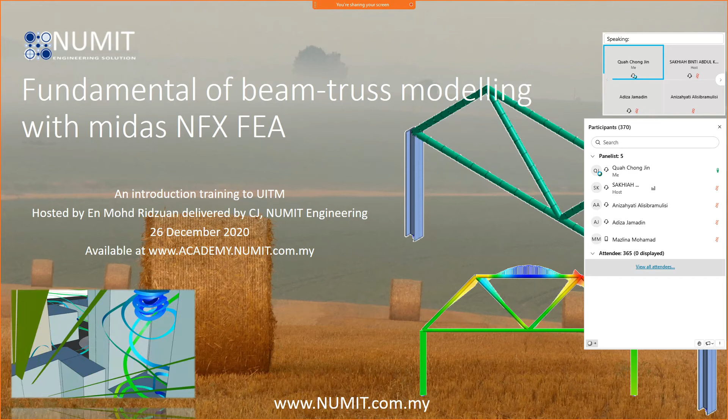So of course you need to have your fundamentals knowledge about mechanicals, about the civils, about the structures, etc. That is the reason why the software can only be used by most engineering students or engineers. Because of this, we have also developed Midas NFX to be used by a draftsman as well, who may not have any education background on mechanical or civil engineering, but they have knowledge on how to draft and design, so they can use Midas NFX too. We have two different modes in the software to help the user utilize it for finite element analysis.

I would like to make a short introduction about NUMIT Engineering. First of all, my name is CJ. I have a mechanical degree background in structures, fluid dynamics, and all mechanical stuff. What we are focusing on and doing right now is serving majorly in engineering - it's a large field. We're focusing on virtual design using CAE, which represents computer aided engineering.

This CAE basically has two different types of software: the one you're going to explore today, FEA, finite element analysis, which is for structural analysis, and CFD, computational fluid dynamics, for fluid and gas. I think you have fundamentals about the elements in our universe - we have gas, fluids, and structure. We are trying to develop software to govern the universe equations, and today we're going to focus on finite element analysis.

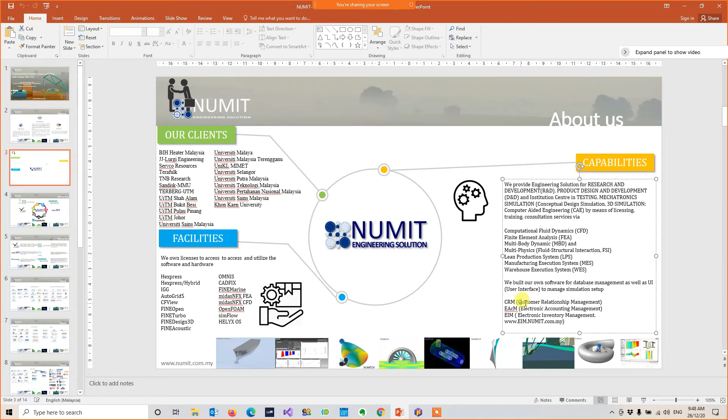Besides providing training on CFD or FEA, we do quite a number of other activities. We also build our own software for database management systems, for CRM, which is customer relationship management, and so on.

In the engineering field, we focus with our partners. We work with our partners for distributing the software and for distributing the training. The training and support is done majority by our own team in Malaysia.

You can see from the top right here, we have SimFlow together with OpenFOAM, which is an open source CFD software. On the left we have Numeca, which is also CFD software as well.

You might be familiar with midas NFX, which I promoted a moment ago. Siemens has a very large application, from testing up to simulation itself. We collaborate with them for the simulation area. Fraunhofer develops simulation software, but they are more focused on multi-physics.

So these are the summary about the company from different parts of the world. Numeca is from Europe, Midas, the software we are going to use today, is actually from Korea, and Fraunhofer is from Europe as well, and so on.

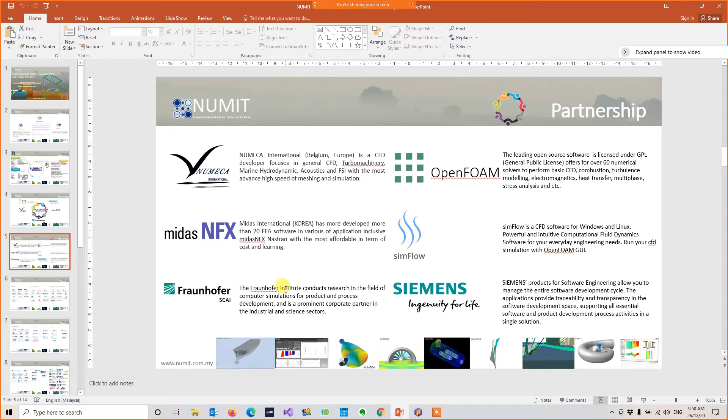So these are our local clients who use both our software, and these are our experiences working on different cases in different disciplines, with different industries and universities as well. So I'm going to skip this.

All right, so today we'll be focusing on the truss, beam, and frame using finite elements. I was informed that most of you do not have any fundamentals of FEA. So what is FEA? What is so difficult about it? FEA is something that is not difficult, it's not complicated.

If you have, let's say for example - let's go back to calculus - a differential equation, something like a PDE, a partial differential equation, how are you going to solve it in our engineering activities? You're only using integration, a different method of interpolation, and so on. I believe you've heard about the discretization of the partial differential equation, whereby you convert the original PDE, the differential equation itself, back into the finite difference method.

Okay, before I start with the sketch, this is the final result you're going to see. So this is the midasNFX. I'm going to start everything after that, but I'm going to show you the result first.

So as I mentioned, we are using 1D properties, and we have 3D as well, but today we will be dealing with 1D, because most trusses and beams are preferable to be designed in 1D. Okay, there are many reasons for doing that, right? So you can see the beam and the truss.

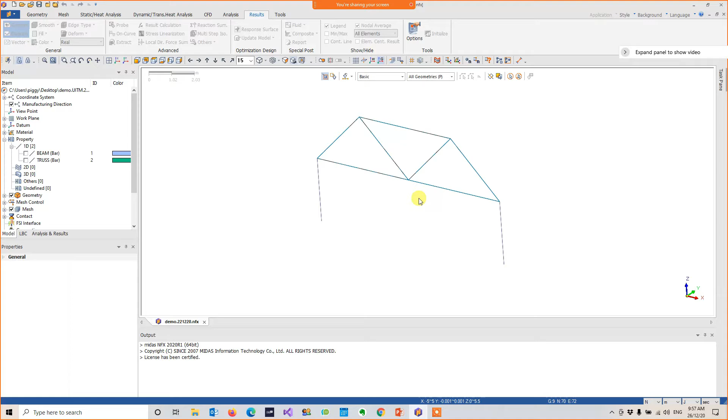Okay, so this is just for visualization. In our real sketch, there will not be anything like this—it's only something like this, right? But if we already assign the properties to the wire, the solver will handle it mathematically, and based on the I-beam properties and the pipe properties, calculate the stress, strain, the bending moment, and so on.

Okay, so I'll be starting a new one.

Okay, so this is the FEA software—this is the Midas NFX. So what we are going to have here is very simple. On the top, for geometries, you can import the geometry from your CAD software. I'm not sure which CAD software you're using, so you can import a universal file format. If it's not listed here, you may export as Parasolid, the .x_t, the ASCII file, the STEP file, or the IGES file. These are four universal file formats which most CAD software can export.

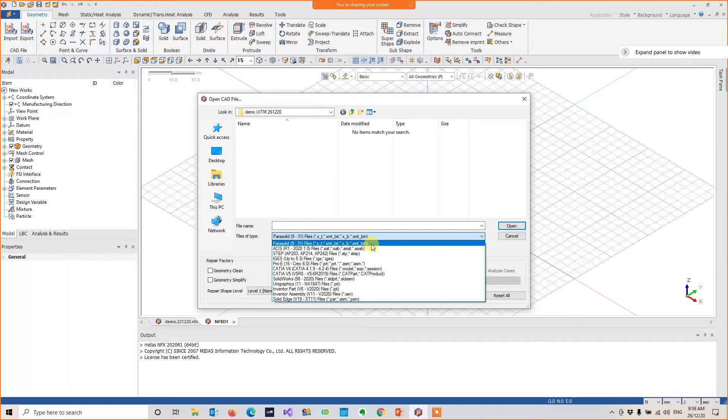You can even try to sketch over here, so I'll do the demonstration. You can have a point sketch, you can have a curve sketch, you can extrude, okay? You can create a surface, and so on.

Okay, so these are the steps of doing the FEA. The second step is you're going to assign the property and the mesh to your model, and then you're going to assign the boundary condition. It depends on the boundary condition or the analysis you're going to do. In our case, we are going to do a static analysis, which means the load is static—it's not a moving load, it's not a dynamic load.

So we are going to use some of the parameters over here. If you are doing a crash analysis, or a drop analysis, or anything that varies in terms of the time domain, you'll be using these tools. And you can see the CFD over here, the computational fluid dynamics—so you can also model the fluids over your model as well. Okay, so the rest will be running the simulation and post-processing your result.

So overall, if you have already been exposed to an introduction about CAE, either computational fluid dynamics or finite element analysis, it is composed of three sections of the software.

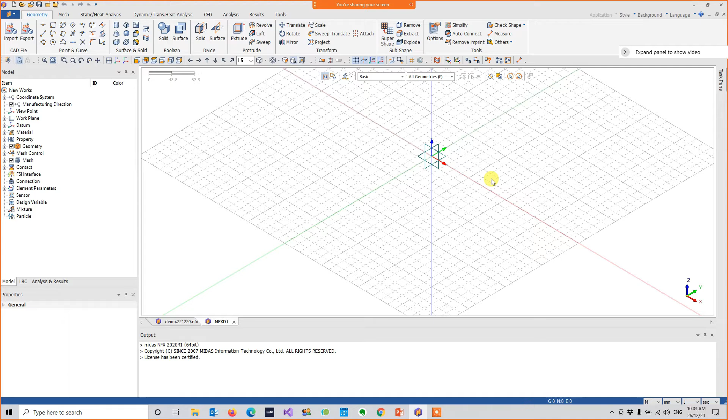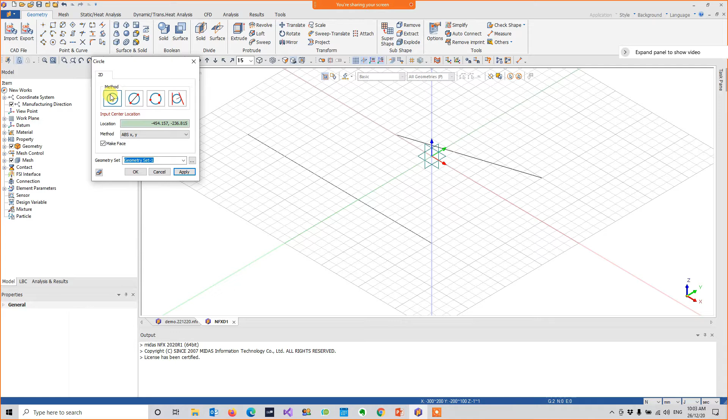What I'm going to do is make a sketch in midasNFX, and you are seeing the grid. Whenever I make a sketch, on 2D it will always fall onto the grid itself. So let's say I have a circle - it will fall on the 2D onto the grid itself.

Let's just undo. If we go back to our presentation, I'll be using the z-axis to represent our vertical direction. I'm going to switch and move this grid into this direction. It's up to you, but in my practice, I prefer to use z as my vertical axis. It doesn't matter.

The second thing is the selection of your grid size. How do you know what grid size you're going to use and what the current grid size is? Let's measure - I'll be using this measure distance tool. So this is about 800 millimeters.

Let's go back to our presentation and see the dimension. We are going to have 10-meter width, so the maximum is 10-meter width. So 800 mm definitely doesn't fit into our geometry, so we are going to increase the size.

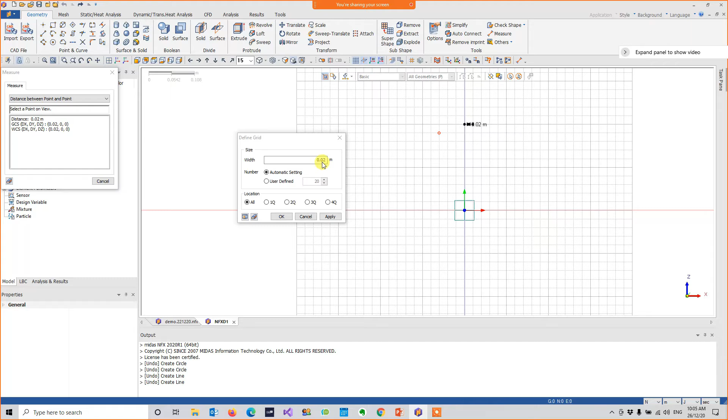Since we are using meters, it is convenient for me to switch to meter, and we are going to increase the size here. The size of the grid is 0.02 meter, which represents this. Let's increase it about 5 times and see what happens.

So we zoom out. Let's check 20 meters. I think it's good enough, or maybe we can reduce it if it's too much. Perhaps let's try 0.1.

And zoom it up. The zoom in and zoom out is just using your mouse, either the button or the scrolling. So we have 4 meters, so that is not enough.

Let's put it a little bit higher - let's put 5. I believe this is a good size that we can work on the sketch. 20 meters will remain the same. Let's see what we have.

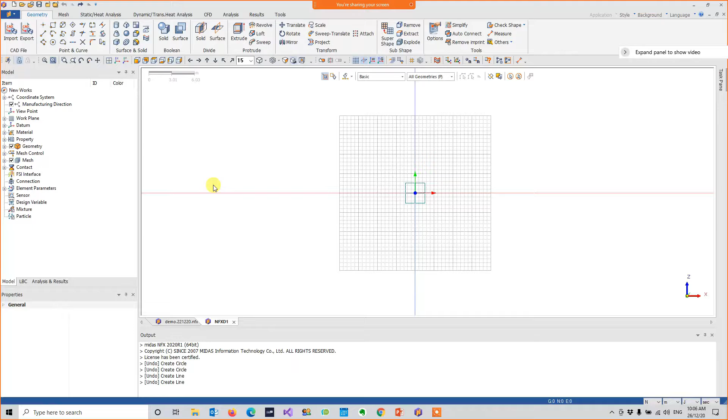We are going to have 10 meters and 3 meters. Let's start with 10 meters perhaps - let's start somewhere, I think this is about 10 meters. That's good. Let's select on 2D so that the line will lay on our 2D, and let's turn off our grid and the reference datum.

Now we are going to create a 3 meter length of the edge, and let's do this 2D again, up to 2 meters. We're gonna have 3 meters. If you observe on the left pop-up window, we have 0 comma negative 2.5, so we're going to set it at 0 comma negative 3.

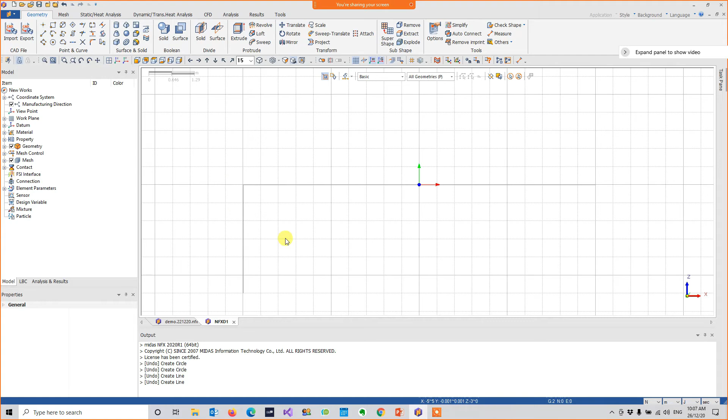So in either way you can do that. You can sketch another line here, or you can use translate to move this line into the x direction. So this is the x direction, with the value of 10.

So the line of this dimension is 10 meters. We are going to copy another one into here. Before you apply the new location of the edge or the line, we can make a preview.

So where is your geometry kept inside midasNFX? We have 3 tabs where you can see the model, the LBC, and the analysis. The model means the geometry will be kept here. The mesh will be kept into the model tab. The materials, the properties will be kept into the model tab.

LBC means load and boundary conditions. So all the setup about the boundary condition, like the fixed, the constraint, the load type, will be kept here. And once you have run the solver and you have the result, it will be displayed over here. That is as simple as that.

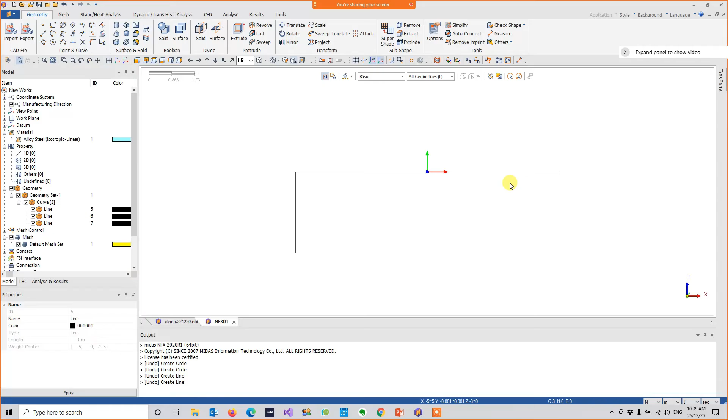So let's turn on this one. What I'm going to do is create another 2D sketch. Click one point, then you should have a relative point. So this is 5, so this is 3.5, 4.

It is easy for you to drag by using the mouse if your value is an absolute value. But since we are using 5, let's say if you have 5.18 or 6.12, you have to refer and put it into this box. So let's go to 5.

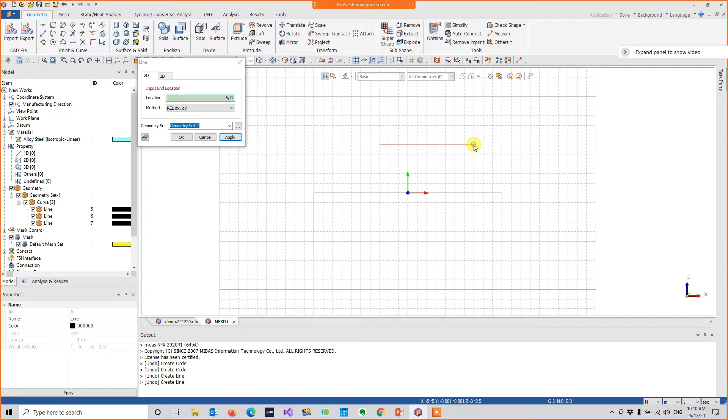That is done. We are not aligned perfectly. First let's check the distance. So the distance between this point to this point vertically is 2.5, right? According to our dimension? Yes, that is correct.

So we don't have to translate anymore. We will check again. This 5 meters is sitting between the distance from here up to here, so this is supposed to be 2.5 with 2.5 distance, so that it can sit into the middle of the 10-meter symmetrical.

So make sure that this distance in the x direction to this distance in the x direction is supposed to be 2.5. How are we going to see that? dx, this is the current distance. So our current distance in the x direction is 1.5, so we have to move it until 2.5.

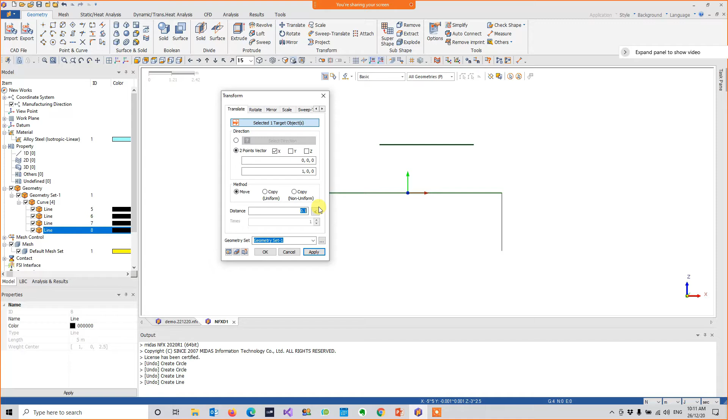So we are going to move it 1 meter again to the left in the x-axis. Click, select your model to be translated. You're going to select translate into the x, with the value of -1. This time we are not going to copy because we're going to move everything. And let's preview.

We will double check what is the x distance. Yes, perfect. And of course this is 2.5 as well.

Okay, so we will build the rest of the truss using 2D sketch. That's all. So we have already fixed points, and now it's easy for us to make a few new lines.

So this is the line curve. We are not going to deal with surface. We are not going to deal with solid.

As I mentioned, basically when we are dealing with truss and beam, it is preferable to use line to model it. The first thing is it's easy and straightforward, and the second thing is, based on accuracy, it is much more accurate compared to 2D and 3D, according to our benchmark and our verification with testing.

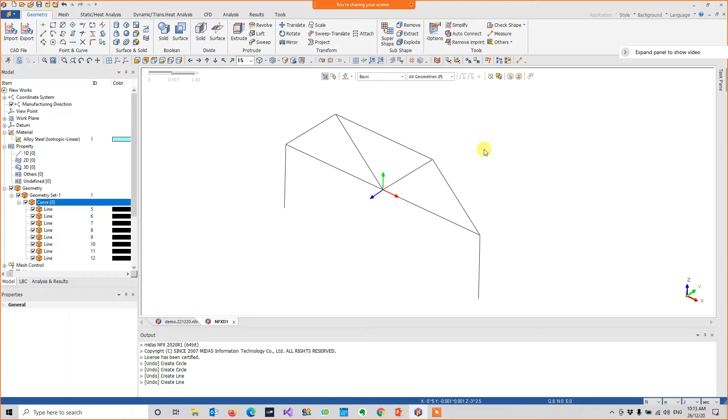So this is what we have done so far. This is the model, the exact model from the presentation, without the I-beam and without the pipe yet. So now we are going to select materials.

Click on the materials, right click, add isotropic materials. You can access this materials window with any button as well. Besides using right click with your mouse, you can go to mesh, materials, then create isotropic. Then you should access to the same window.

Let's maintain with this one. I prefer to use steel for the demonstration. Let's select from the library. When you select steel, you have all the parameters. But if you have different materials, you can define your own materials as well. So I prefer to use the library first.

Okay, by the way, just pause for a moment. Materials have different types of behavior: linear materials behavior and non-linear materials behavior. Linear material behavior means it applies Hooke's law, F equal to kx, which is linear. When dealing with rubbers, for example, that's non-linear material. Even steel belongs to non-linear behavior in some cases, if you apply large loads, so it behaves non-linear.

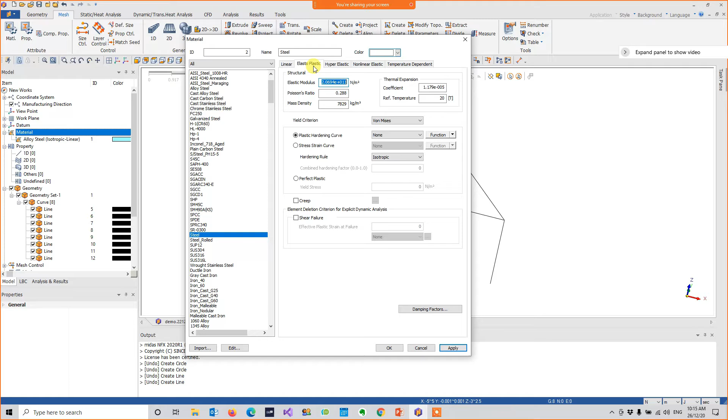Let's keep it simple for our demonstration: linear, and press OK. We have steel created. Let's close it. This is the newly created steel, right?

So I'm going to assign the steel to the lines, the wire, or the edge. In order to do that, we have to create two things: first, the properties, which is actually the link between your materials and your line. However, the line will be represented in the mesh. I'll show you right now.

First, let's create your properties 1D. We are going to use bar and define the section. The area, moment of inertia, and torsional constant will be calculated automatically once you design the type of beam or bar itself. Let's use I-beam.

Let's go back to our model. Okay, I'm using mm, 300 by 300, so these are all the dimensions. This is dimension 1, this is dimension 2, dimension 3, etc. I think this is straightforward. So what I'm going to do is, before that, just click...

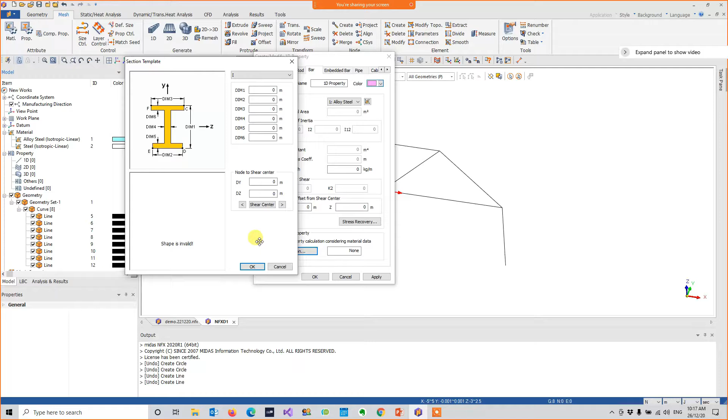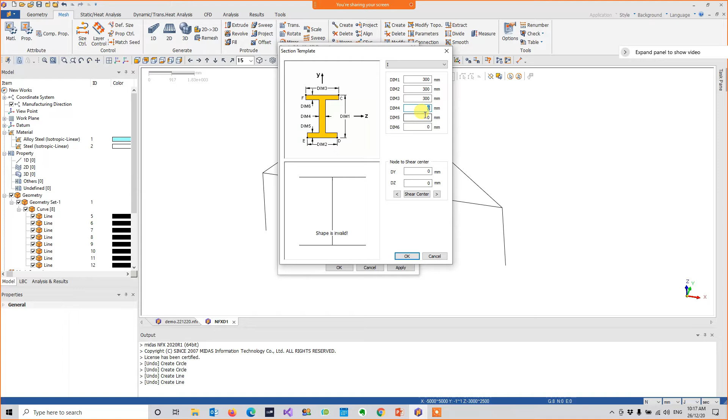Switch to millimeter, create again bar section, and I'm going to use I-beam. I'll refer to the presentation: 300 by 300, this is 300 depth, 300. Dimension number 4 is 10, 15, 15. Okay, so this is the I-beam.

Remember, the beam will be assigned to steel, so everything will be made of steel. So I just name this as beam. Okay, so this is the properties. You cannot see the real geometry yet, like this one, until you generate the mesh.

Okay, so I'm going to prepare another property before I generate the mesh. I'm going to use the pipe—sorry, I'm going to use the bar again. Assign, make sure this is steel. Before I assign the section, let's name it as truss.

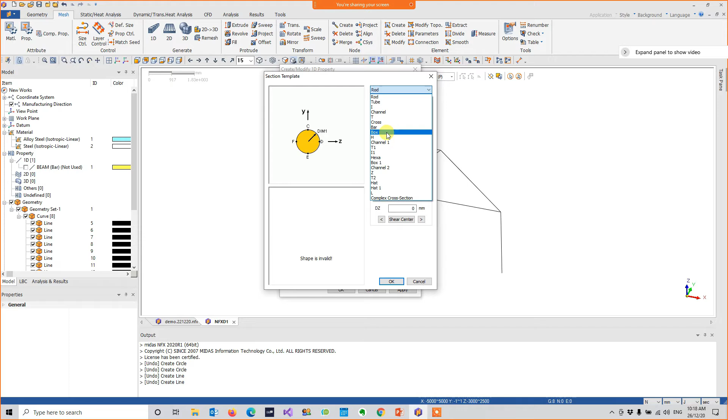So in the truss, I'm going to use pipe. Pipe—no, there's no pipe, right? Just a moment, where is the pipe? Oh sorry, it's a tube. So we have another two dimensions: this is the dimension which is the outer radius, and dimension 2 refers to the inner radius.

The outer radius is 84.15, and the inner radius is 79.15. This is in mm, of course. Apply, check, check. Okay, so this is the beam, and these are the truss.

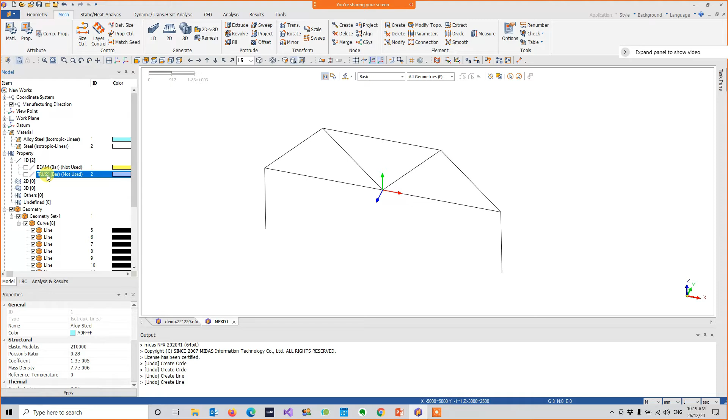Now I'm going to link the materials with the property itself by using the mesh. So I'll be using the mesh. Now we are going to generate 1D mesh instead of 2D or 3D, so this project, this demo, is focusing on 1D.

Let's select a size, perhaps 2. Let's select the object. We're going to start with the beam, then we are doing for the truss afterwards. Okay, so the y-axis direction, right? So let's keep this one as... okay, so what is this?

When we are creating a 1D mesh, we need to supply one extra piece of information and tell the software the direction of the 1D mesh. The direction refers to the normal direction, not the propagate direction. If we build a mesh along this line, the propagate direction in this case is the z-axis. The normal direction in this case is x or y. So let's use y.

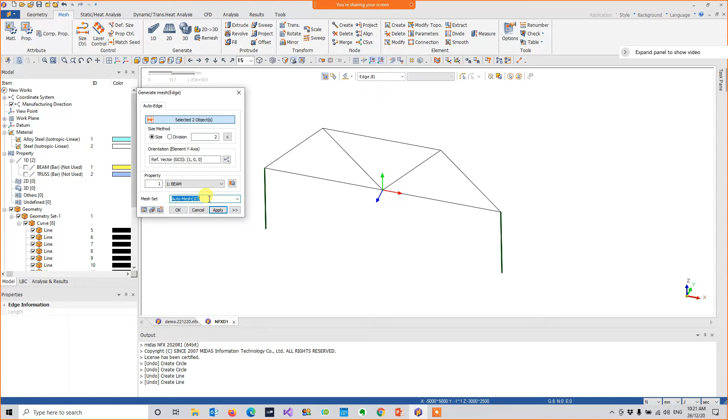So that means let's activate 1, 0, 0. Putting 0 or 1 means you activate in that direction; 0 means you deactivate in the rest of the directions. Let's press OK. So this is the beam. I will rename this one as beam.

So I have put quite a number of mesh here. I'll just undo and do it again. Instead of the size, I'll put it as division, meaning there will be 2 mesh nodes only on that particular area. Again, 0, and this is the beam.

So this is the properties, referring to this one. Remember and recall that we defined the dimension of the I-beam. We defined the pipe dimension in the inner radius and outer radius as well. So these properties refer to the properties we created a moment ago.

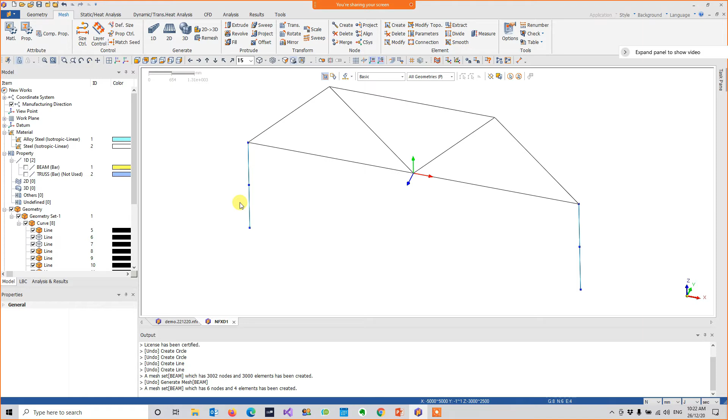So if we selected the right properties for this mesh and we turn it on, you have the I-beam. Okay, I think it's going to be very simple right now.

We are going to create this mesh, and I'm going to put... okay, let's put division, let's say 5, or let's put the size, it doesn't matter. So you investigate what is the proper size. How are you going to determine the size? Simple but...

lengthy. So first, you have to do a mesh independent study. A mesh independent study is: initially you guess what is the size of the mesh. Whatever mesh you put in, then you do a second simulation. You adjust the mesh, and a third simulation you adjust the mesh again. Of course, you already have the experimental data at the beginning of the simulation. You compare with the experimental data, and in the mesh independent study you study different sets of mesh sizes against the result itself, and plot a graph.

Let's say you have a 0.5 meter mesh and you get this stress. Then you plot the graph again with 1 meter, and get that stress, and so on. This is where you do the mesh independent study until the result becomes stable, falling into a particular constant magnitude. That is your final element size.

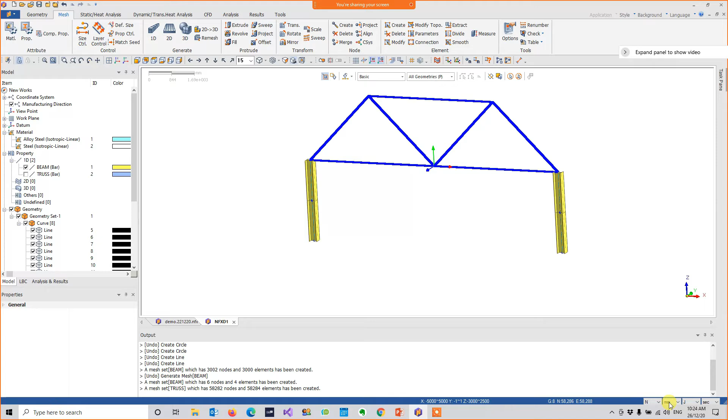Okay, let's put 0.5, and this is truss. So we have generated... wow, this is huge, because 0.5, sorry—this is in mm, so I was thinking 0.5 is a meter. So let me just put this into meters, 0.5.

We don't have to modify the y element because the normal direction will be z here, or y—so it falls onto the default element axis. So this is truss again. This is truss. Okay, so I'll just preview.

The number should be greater than 1. Oops, I'm sorry for that. Let's put two—oh yes, this is division, this is size, sorry. All right, I'm putting the size to 2. Yeah, that's good.

So I assign the properties, truss. Okay, so done, and let's switch it on. So what you are seeing does not exist in reality, but the solver will take these properties into the calculation. It's a mathematical modeling, right? Okay, so we have done the modeling.

We have done with the steel. The mesh has been generated. You see that? This is the beam. This is the properties of the mesh beam itself, and we have the steel assigned, etc. Remember, save your project.

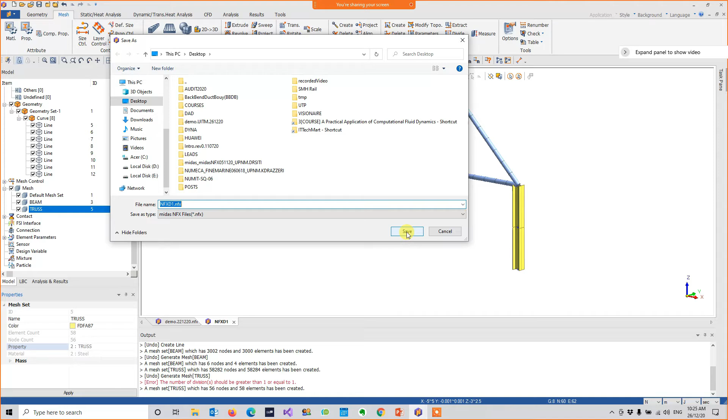I have a few clients, a few friends, who don't like to save the project. When the software crashes, they have to reopen. So I asked them why—why don't you want to save the project? He says, I never save the project because I save the project in my mind. So all engineers know what to do. Just funny, right?

Okay, so what I'm going to do next—I have the pre-processing ready, and of course the boundary condition has to be there. Let's look back into our presentation. So now we are going to tell the software where the constraints are, where the forces are, etc. This is what we are going to do right now.

We are going to LBC. So since this is a linear static, I'm going to put in the constraint, fixing it using advanced. The reason I'm showing you advanced is that you can play with the constraint in 6 degrees of freedom. The 3 degrees of freedom is translation, which is tx, ty, tz, and another 3 degrees belongs to rotational, xyz again. So I'm going to fix this one.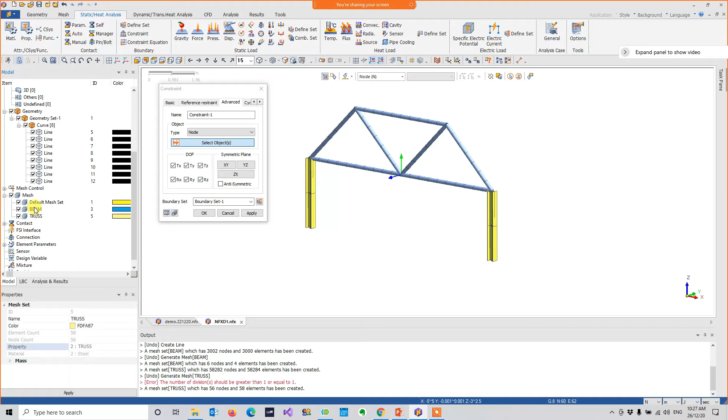Since I have already activated my mesh, let's switch off my properties and turn off my geometry. Then I should be able to select. So let's say if you do not want to select on the beam or on the mesh, you want to select on the point, then we will turn on this one. So what are the differences between the point and the nodes?

The point, the edge, the face belong to geometry, which is here. You can create the point, you can create the edge, which is the line or the curve, and you can create the face, which I did not create. The nodes belong to the mesh.

In my practice, I prefer to apply on the point, but in some cases you have to apply on the nodes. In order to apply on the point, you have to activate the curve. You don't have to switch on the mesh, no problem with that. So this is selection for this area, we have one here, we have another one here. In fact we are not selecting the nodes, but we are selecting the end point of the edge.

So let's say this is fixed. You'll be seeing a representative of the fix here, and the information is kept into the LBC again, the boundary condition.

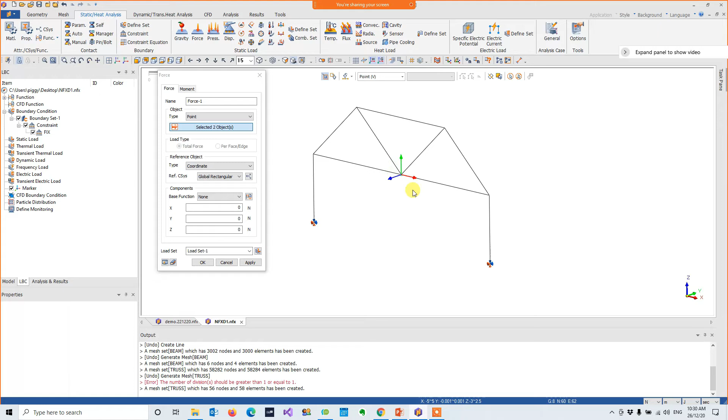Point, this point. So we can turn off this one. We're going to have a magnitude of just 10 Newton. I hope you understand why I'm putting minus - this is Z, positive going upwards, negative going downwards. So it's going to apply downwards, and I'm going to have a point.

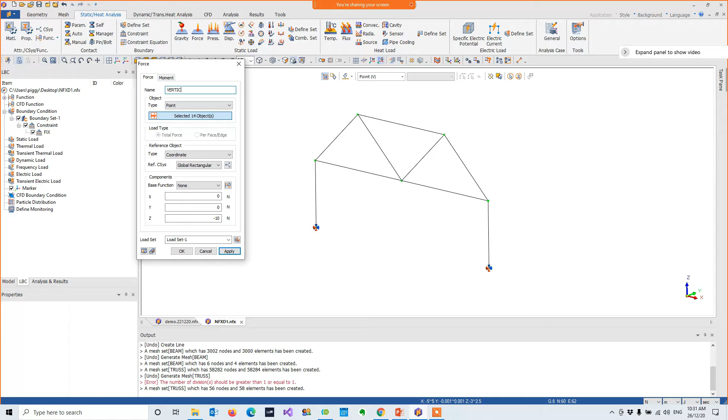Sorry, it doesn't matter, you can do it again. Point, select the point, you can drag and select. When you select the point, this is already filtered by the point. So minus 10, I'm going to put this one as vertical force. This is the magnitude of 10 Newton in the direction of negative Z direction.

The last but not least, I'm going to apply a beam load. Why I'm putting the point load is because this is due to the weight of the truss, due to some other weight, and the beam load can be a weight on the slab itself. That is why I'm putting a beam load.

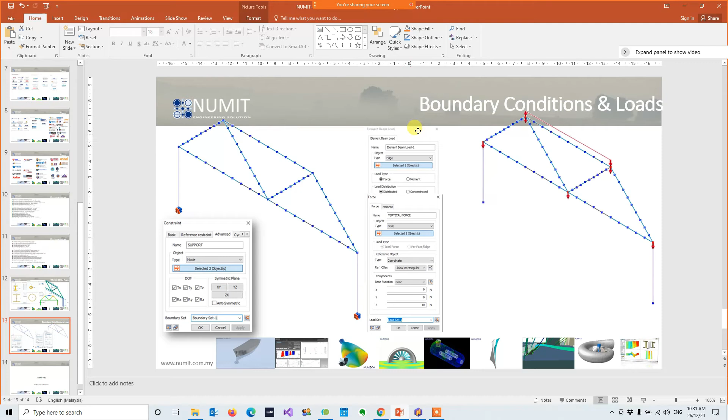So I'm putting on the edge, select the edge, so you can do fractions. Let's go back to our presentation - this is the beam load. We are going to apply a fraction of minus 1000, and the second way is minus 2000. What is this? Let's look at this one, this is 1, minus 1000. So what is this?

So it's a proportional from 1 point, which is W1, into the W2, with the slope value, right?

You can apply any type of force. You can apply a constant, say 2000, if you have a constant load. In some cases, you may not have a constant load line along the beam or along the slabs, so you have different fractions, and you may use this instead.

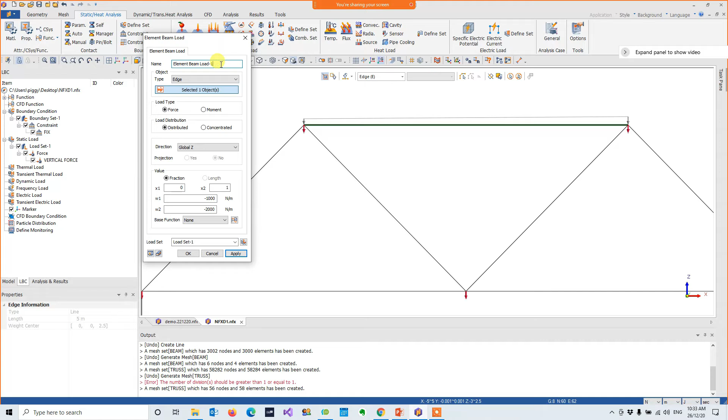So I would say that this one is a beam load. Okay, let's save it.

So I guess we have done most of the work in the preprocessor: the mesh, the materials, the geometry, and the boundary condition itself. So the next step is we are going to set up the solver, so we go to analysis and result.

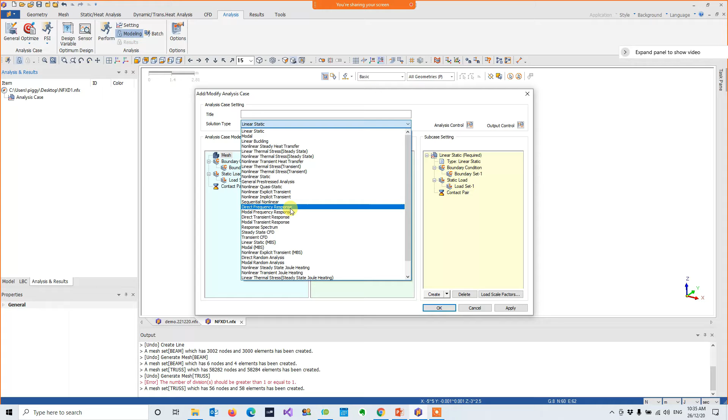We can go to analysis to create the type of analysis. In NFX, we have quite a number of types of analysis - I'd say a lot. If I drop down, these are the different types of analysis we can do in FEA. For the moment we are not able to combine solvers or analysis types, but we can do a wide range of independent analyses, for example thermal analysis or vibration analysis, and so on.

In our case it's very simple - we create a linear static analysis. Let's just make a name, Linear Static 1 perhaps. So look at these things: we have all sets, we have activate parts, we have subcase setting. We are going to set up the solver as I mentioned. Initially we have something like that, because when you create the linear static, it automatically selects all your meshes, all the boundary conditions, and the loads.

But I'm going to show you manually how to involve this mesh into my analysis. So what is default mesh? Just forget about it - it's nothing, no value. It's created by midasNFX, it has to be there, but it has nothing to do with your case.

So this section is the selective mesh for our next simulation. You can select different types of mesh to be involved in the simulation. In many cases we use this advantage - we try different sets of mesh, and we see what the result is.

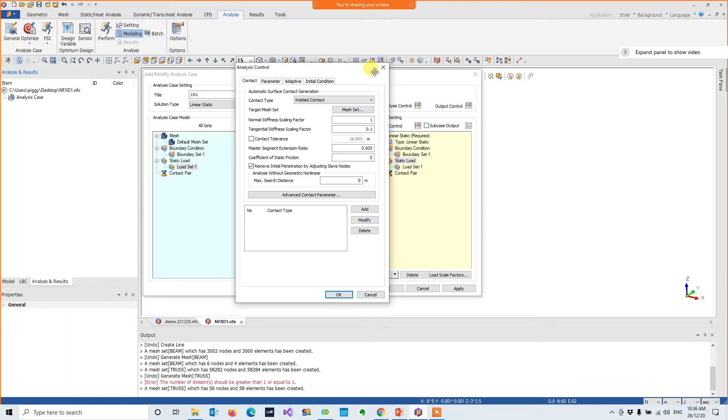The boundary condition has already been set up. We will select and drag it here, select the loads into here. Since we don't have to do any settings, just leave it, then click okay. You should see the LN1 has been created. Remember, save your project.

So yes, we are ready - right click, solve it. This is linear static analysis, and we solve it within 0.3 seconds.

So what we are going to see here is the result. But you are not seeing the result if I double click on this one. The reason is you have to keep in mind the result is kept inside the mesh, not the geometry. Let's go back to the mesh and geometry.

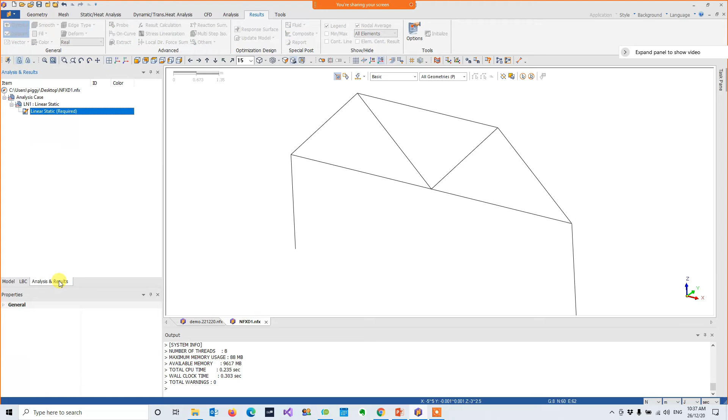You may look into the geometry - this is the geometry, the CAD itself. You may look into the mesh - it looks similar, but the mesh contains equations and nodes. In each node there is a set of equations. So when we run the solver, the equations are solved within the mesh itself, not the geometry. That is why you cannot see the result when you activate only the geometry but not the mesh.

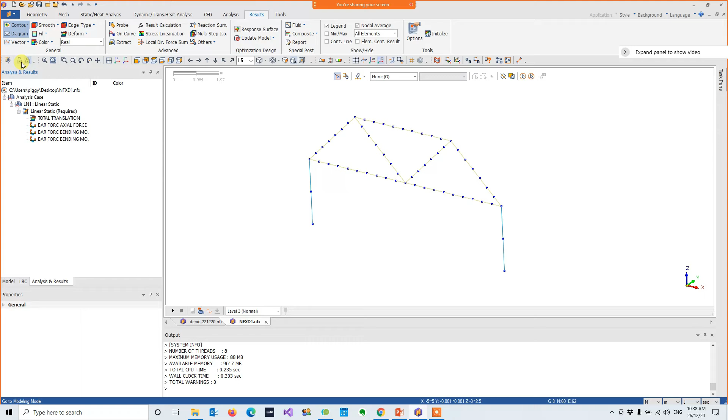So let's go back. In order to view the result in midasNFX, you have to turn on post mode, which is the post-processing mode - this is pre mode. Whenever you finish your simulation, it will automatically switch to post mode - that's why you were seeing some colors just now. When you are editing your geometry again, your boundary conditions, or your materials, you go back to pre-mode. Pre-mode means pre-processor, post-mode means post-processing.

So let's see the result and double click. We have the translation, and let's align. So this is alignment: align in front, align in back, the top and the bottom.

So why do I prefer to align when I draft the model into the Z direction? That is because I love this one. I know that this is front, I know that this is top, right? It's easy for me. Then you should be able to see the bending moment.

So this is the force bending moment in the Z. This is the force bending moment. No, we don't have that, of course. So the axial force, etc.

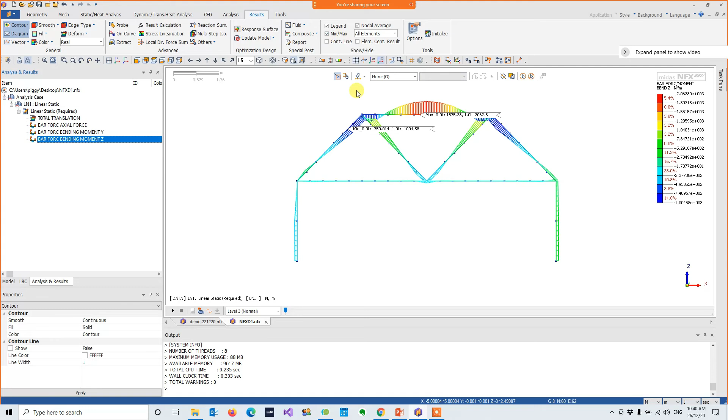So what else you can do with the post processing is sometimes it's very important for you to look into the maximum and minimum value. Okay, for instance, like translation.

Remember this translation, the unit is in meter. We have 0.0024 meter deformation. But in this case, I prefer to use millimeters because it's already to the power of -3. So it's more appropriate to use that, right? We have maximum here, we have minimum, definitely, so there is no movement.

We can amplify the result. Amplify the result means you can amplify the display. It doesn't mean that you will increase the deformation, but it's just showing you the deformation result more, auto scale. This is not real, but this is real.

Because our deformation here, the maximum is 2.4 only, 2.4 millimeters. And if we amplify, then it is good. In this case, it is good. If you include this in your presentation, and if the deformation is not obvious to someone, you can increase it, or use 0.5, whichever you prefer.

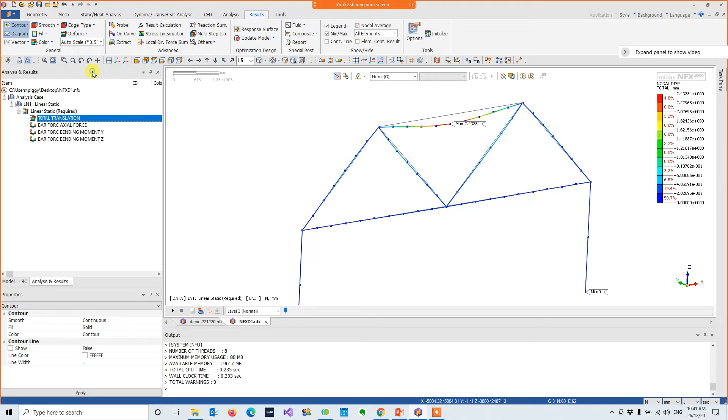So this is the deformed mesh. I would like to include both deformed and undeformed mesh. So this is to show you how you can post-process your result. This is not really a nice graphic, but if I do that, it's much better.

Okay, the next thing you can do is use the probe. Let's turn off this. You can use the probe. So as I mentioned, the mesh that's generated contains the equation, and once the equation is solved, it contains the result. As simple as that.

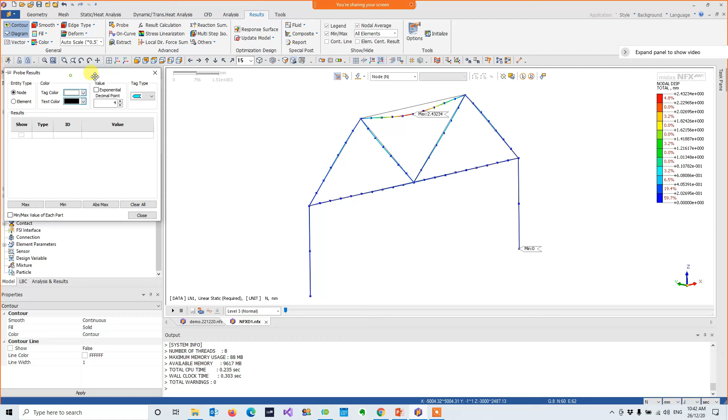So what you are seeing here, these are all the nodes we have created from the mesh. So these are the mesh actually. So if we use the probe again, and point to each node, what do you have? You have the node result.

So now the question is, we have created 0.5 meter mesh nodes, right? And what about in the middle? So the intermediate will be interpolated or extrapolated between the neighbor nodes when doing the calculation or the simulation.

We are using some terms here: a coarse mesh, fine mesh, or intermediate mesh. As I mentioned earlier, you will not know what is the appropriate size to use. So in this case, you may rely on this size, but who knows, you may have to increase or reduce the size of nodes, which means you will have more nodes.

So which size will be appropriate? I don't know, you also don't know, but we have to perform another analysis, which is the mesh independence study. Initially I assigned a 0.5 meter mesh size, so I have the result. I keep the result, and I will do another simulation, regenerate the mesh, and reduce the size.

Let's say 0.25 meter, so the distance is smaller, which means we have more nodes. And I'll compare the result. In this case, maybe I will compare with—I'm not going to do that now—but just imagine comparing a 0.5 meter size mesh nodes in terms of displacement, with a 0.25 meter mesh node size displacement.

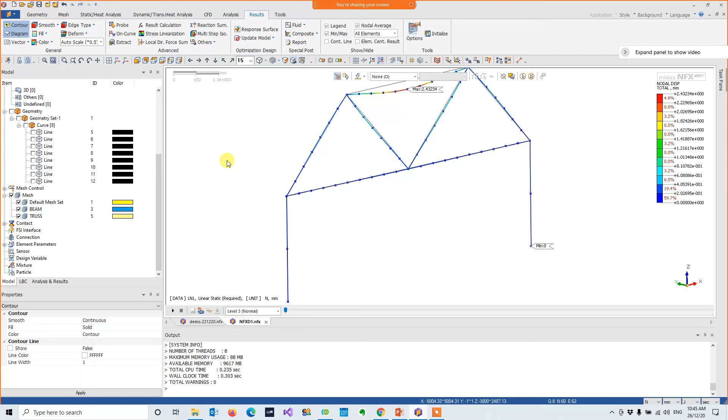Let's say if you are using our software, if you have already installed it, this is important, this is for your practice. Once you have installed the software, the installation will by default go into the C and program files, and logs into the directory of the software installation. I'm using 2020 revision 1.

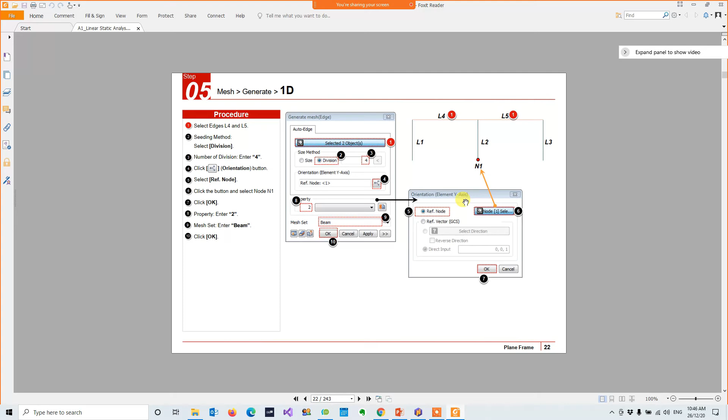If you go into that manual tutorial, you have all the tutorials ready. You have linear static, if you click, you can practice. You see, you have almost the same demonstration that I have done. You can refer to here, you have many tutorials you can follow. This is linear static, and this is 2D, which I did not include. You can follow how you can create a 2D, how you can create a function, something like that.

It's more advanced. Okay, so let's go back to the folder. These are all the manuals in PDF. These are the models you may need to run your tutorial. This is the 3D model, the x underscore t that I mentioned to you, parasolid, the STEP file. So if you refer to any of the PDF, it will mention which of the model to be used for your practice in your tutorial.

So I will just close off this one. I think that is all the thing that I have to deliver. Let's see if I have anything else to do. Okay, I think that is all I have to deliver.

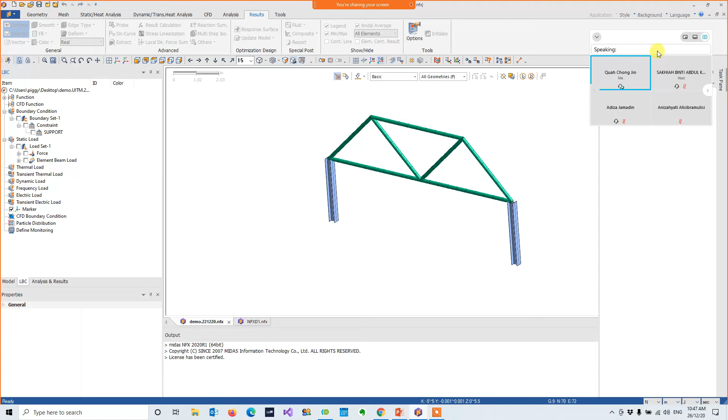Yes, Dr. Sakhiah. I'm waiting, Dr. Sakhiah, to see if any of you have questions, then you may ask me. Yes, I think, yeah, Dr. Sakhiah. Hi, Dr. Sakhiah. I think they have one question here from Muhammad Iksan.

He asked about displaying shear force diagram and bending moment diagram. Okay, so on the result visualization, yes, you need a diagram, right? Okay, then perhaps I will prepare that. I need to prepare that, and then perhaps Dr. Sakhiah, you can share with your students how he can actually create a diagram. So I'm not ready with that yet in this model, okay, so I'll just write down the diagram.

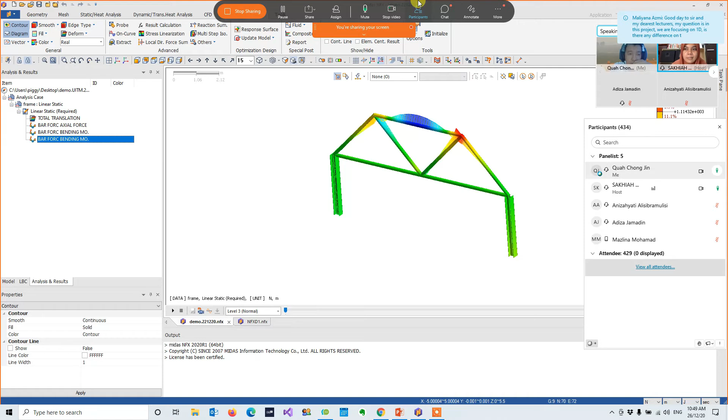How about the other students? Do you have any further questions? Please ask, because this is the only opportunity that you have to interact with someone who has ability on MIDAS software. Anyone of you can feel free to ask. Students from 5C5, 5A3, 5A1, my students. Okay, I see one of the chats here.

Okay, so we are focusing on 1D. Is there any difference in the procedure if we are using 2D? Okay, that is a good question. Yes, if you are doing for 2D, or proceeding with 3D, it's much more—I would say that you have to do some extra work also.

The process flow is still the same. You select your property, you select your materials, that part is the same as well. So you select your materials. If you're working on 2D, you will add a 2D, whether it's membrane or plate, then you have to size the thickness. Let's say you're working on the slab itself, so the thickness itself is what you have to define. Then you will create a 2D mesh, so that means you have a surface already. So instead of 1D, then you have a 2D surface.

Boundary condition remains the same, the solver remains the same as well, it's nothing different. So it's just the model—if you're dealing with 1D, the wire, you have to create 1D properties and use the 1D mesh. If you create 2D, you generate 2D; 3D, you create 3D. And the last question, yes, you can combine 1D, 2D, and 3D. But since you have different types of dimensional mesh, you have to ensure the 1D and 2D or 3D are connected properly.

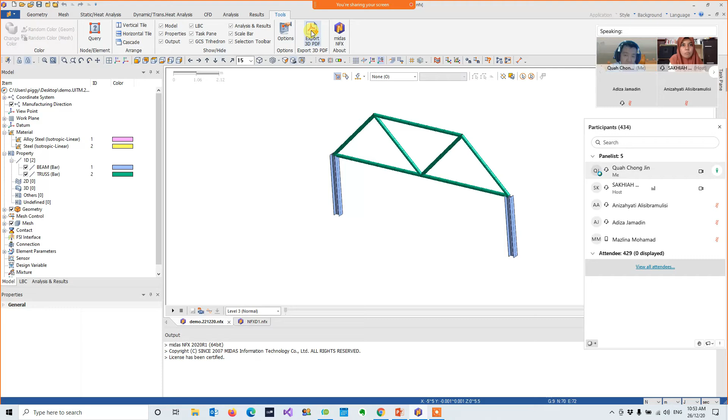To export into 3D PDF, you have to open it with the full version of Acrobat Reader. In the 3D PDF, you have the ability to rotate the model, see the result, and explore the model. It works in the same environment as CAD and midas. You can see all the results - stress, bending moment, etc. So this is export into PDF, but in 3D format.

But if you want to export the result without creating your own report, you can rely on the midasNFX report. It's a Microsoft document, so you can create a report using the wizard to generate it automatically. So it's not PDF or 3D PDF, just a report - you get the extract, the mesh, and so on.

Just like what you're trying to create in the thesis. I hope that's clear to you, Radia.

The next question is: can we transfer the drawing from AutoCAD to the midas software? Now, AutoCAD has quite different versions - you have Inventor AutoCAD and 2D AutoCAD. The answer is yes. If you're using 3D AutoCAD like Inventor, you can export the 3D Inventor model into the parasolid X_T format.

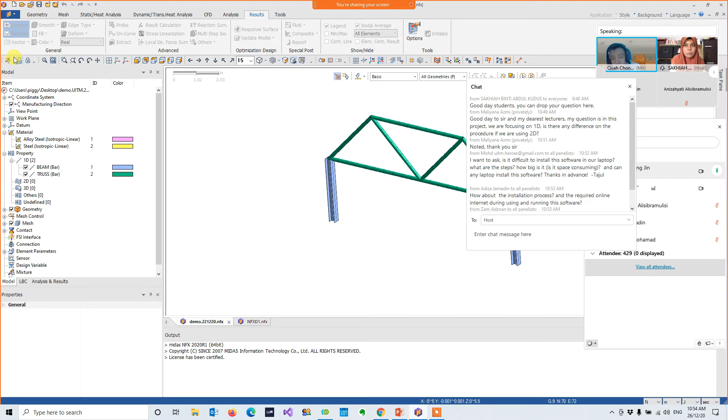If you're using 2D AutoCAD, yes you can also do that, but you will be importing a wireframe. When you import the wireframe, you have to clean it up. You'll go here - this is import DXF, the so-called AutoCAD format. It's just wireframe.

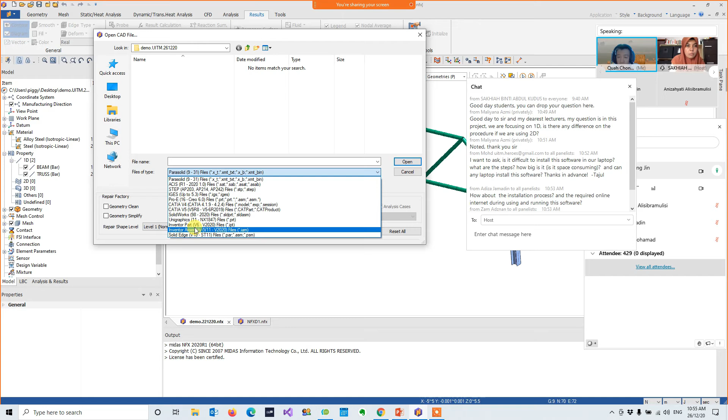In normal importation, we're basically dealing with 2D or 3D. So we use Parasolid, ACIS, or step file formats, and you'll see Inventor works mostly in 3D. So whether you're working in 1D, 2D, or 3D in Inventor, it can be imported directly.

This is a little bit different if you're using AutoCAD - this is the option for importing the wireframe. So the answer is yes, it's possible.

Then there's one more question: how can we install the software? Installation is just straightforward - simply double click the execution file. I'll show you - there are two things to be installed.

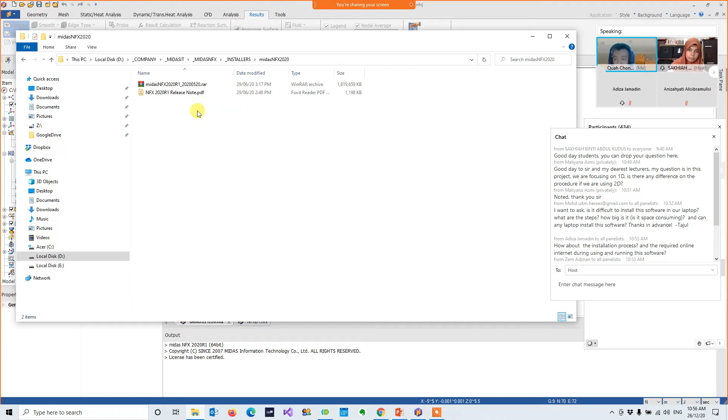I'll show you the installer. We have Midas, midasNFX - I have the installer here. It comes with WinZip or WinRAR, so you have an exe file. It's just a normal installation.

Once you've installed the software, you have to set up your license. There are a few types of licenses you can utilize. For students, you'll go for the web license, which means something like a serial key or serial number, but you have to connect to the internet in order to use the software - you have to stay connected always if you want to use midasNFX.

So if you have the serial key provided by me, I'll show you the steps. I will provide you a PDF with the steps for how you can put in your serial key and activate your license. It's simple and straightforward.

So what else do we have? I want to ask, is it difficult to install this software on our laptop? I think we already answered this one. What are the steps, how big is it? Can any laptop install this software? I believe most of our laptops come with i3, i5, or i7 processors, with dual core or quad core already, right? So yes, it works on your laptop if you have that specific Intel processor.

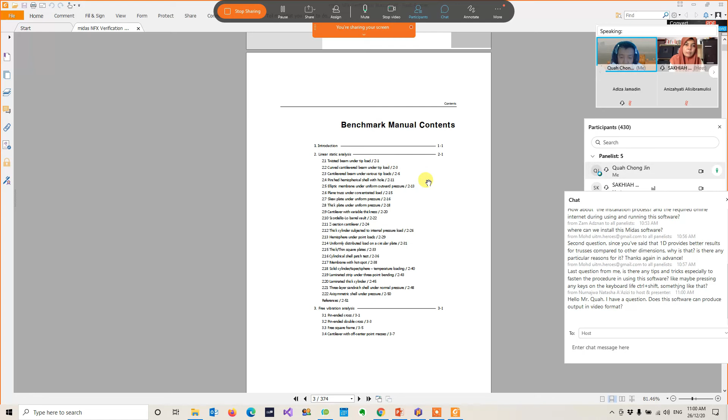Let's go to the installation directory, the manual. We're going to have a verification manual as well. So what is this about? This is about the benchmark. The benchmark is done between our company and a NAFEMS company, whereby the NAFEMS company basically sets up the experiment jig based on a certain experiment. On our side, we try to set up the modeling. We compare our simulation result with the real experimental result. From this result, you may notice that one of the results here deals with 1D and 3D as well. We did a comparison, and as a summary, basically the 1D result is closer to the experimental result compared to the 3D result.

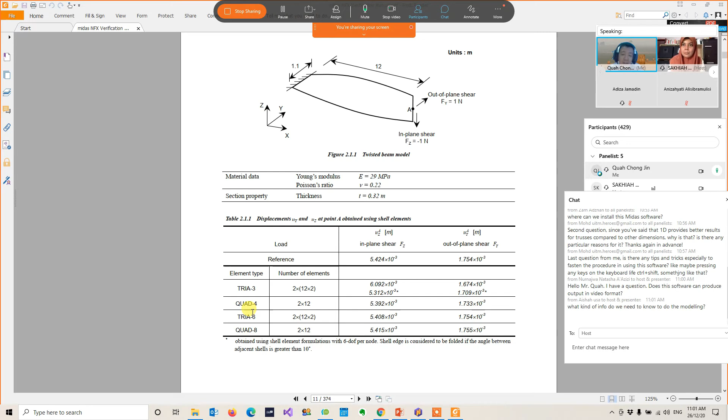If you look into this benchmark, it is very important for a user when you're trying to model something, to know whether you're going to use 1D, 2D, or 3D, and which element type to use. There are many element types in midasNFX. You may refer here - this is the experimental result, for example, and this is the simulation result. So you can make a comparison to see which is the best. I hope this answers your question.

So we have another question. The last question from me is: is there any tips or tricks, especially to fasten the procedure in using this software, like maybe pressing certain keys or something? What do you mean by fasten the procedures - you want to cut short the procedure, skip some steps so it will be fast enough, or simplify elements or something? Initially I did mention that this software is for experts in FEA, but it's also for beginners in FEA or those with non-engineering backgrounds as well.

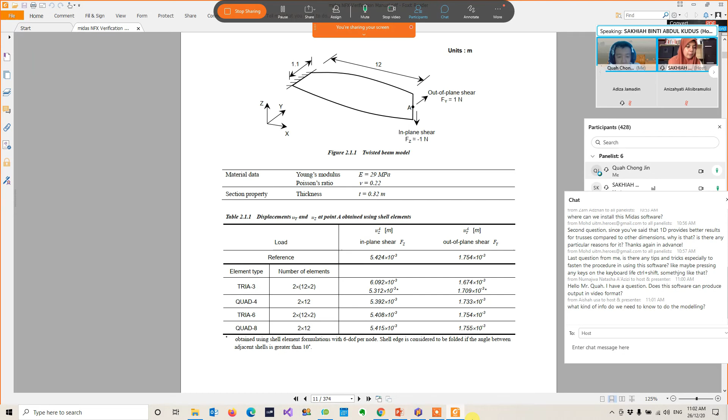So how are you going to do that? Let me show you. Also, I have a lot to cover, so let's create a new one.

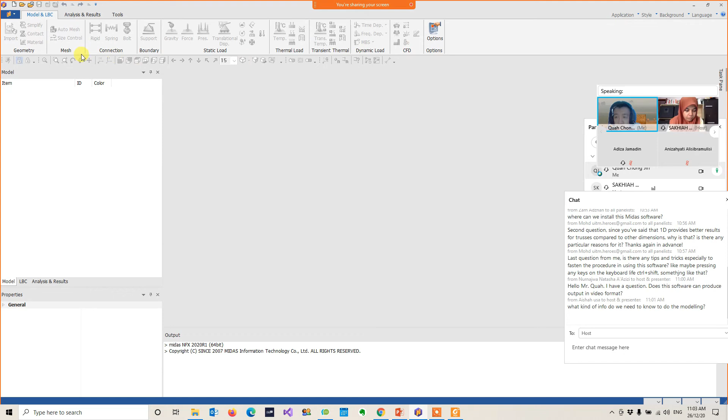Before I start with any new example, let's look at my mouse here. You have designer mode and analysis mode, right? Let's compare the number of tabs and the number of icons. You can see that with designer mode it's much more simplified compared to analysis mode. In analysis mode, you can create many geometries and you can modify or manipulate your mesh. So in designer mode, you are more straightforward, guided by the wizard to do the analysis. This is where you can start if you are a basic user for FEA. Yes, you can do that.

Right, they have a few more questions here. One more is from Amira. Is it possible for us to see real life work, big infrastructure projects that Sir CJ has done?

I think, patience, it's not today. The real world examples are not with me at the moment. I have my workstation in my office. I think I have a few real works coming to mind, like tunnel modeling, with hard rock, soft rock, and the lining. I have done that. I may plan to upload it to my website, academic.newmeet.com.my, where you can explore how you can model real world activities throughout my courses. So I'm sorry, not for the moment. I came with my laptop today, so all my cases are basically stored in my workstation. But stay tuned to our website academic.newmeet.com.my, and you should be able to explore more in the future.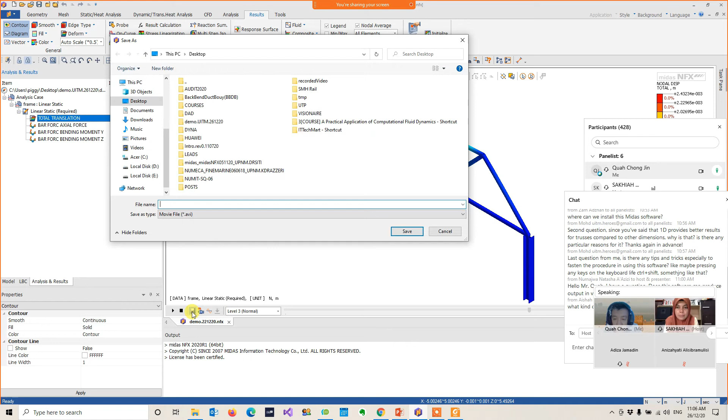So you're going to export, save it as AVI. Okay, you save it as AVI, and then you'll have your AVI file right here. So you can export, yes.

One more question coming here: if the license expires after 30 days, is it possible to install and extend again using the same ID that we first registered, or do we have to use a different one? Yes, the serial key will be reused again for your extension. But you have to tell me, because sometimes there are a lot of requests for this trial. You have to share with me, you may send me an email sharing your serial key, then I will ask our headquarters in Korea to extend your license.

And then there's an almost similar question here: when to use 1D, when to use 2D, and when to use 3D, and what's different in the result? In truss, beam, and frame analysis, usually we use 1D, in most cases. Why? Because it's much more precise, accurate, and much simpler.

I did a real life case study where I have reinforced concrete, and inside the concrete I have rebar. The rebar, I can model in 1D analysis. But there are special requests where they would like to see the crack, the break, or the damage of the rebar. The crack and damage of the rebar cannot be done in 1D, cannot be done in linear static. It has to be done in dynamic analysis. So for the rebar, it cannot be modeled as 1D, it has to be modeled as 3D. In 3D you may be able to see how the rebar breaks off under certain ultimate loads.

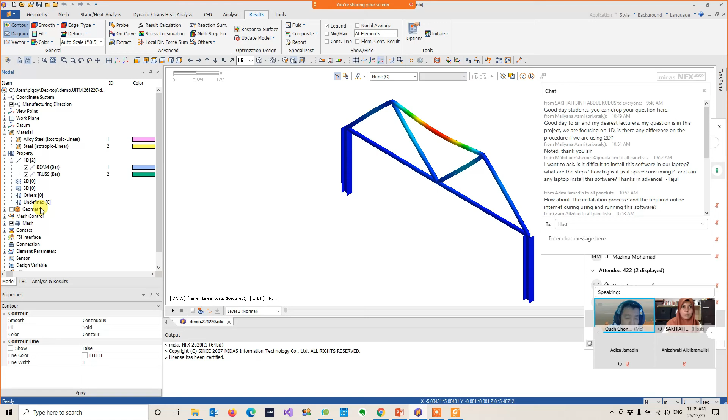I'm sorry, what was your question again? She's asking what is the info needed to start the modeling. There is a lot of info, like dimensions — you need to have an exact dimension of your model.

All right, you need to have the so-called boundary condition. The boundary condition is where you have to observe on site — where to be fixed, where to be unfixed, and how the movement is expected to be. This is very important and very lengthy, so you need quite a number of boundary conditions that sometimes do not constrain every degree of freedom.

In my case, I constrain all degrees of freedom, but in some boundary conditions you have to release some of the degrees of freedom in the actual situation, because physically there is not limited movement in that particular area. This is very important and you need a lot of patience to observe how the boundary condition works. If you put a wrong boundary condition, you will get a different result — in other words, rubbish in, rubbish out.

So you need to have the boundary condition, you need to observe the right possible loads, and you have to know what type of material is used for that particular frame or whatever thing. Of course, the dimension — you have to start with the dimension.

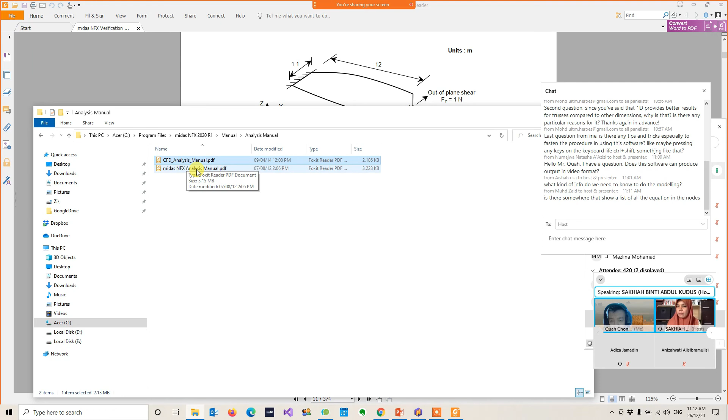Is there somewhere that shows a list of all equations in the nodes? Well, there is, but you have to refer to the manual. Again, we go back to our installation directory, program files — in the manual folder, you have everything: the benchmark, the tutorial, and the analysis manual. It includes both: one for the CFD, one for the FEA, the structure analysis. In this manual, you'll be able to explore how we utilize, based on the category, how we actually make use of the equations and how we set up — this shows some of the matrices for the element. You can find most of the detail from this manual.

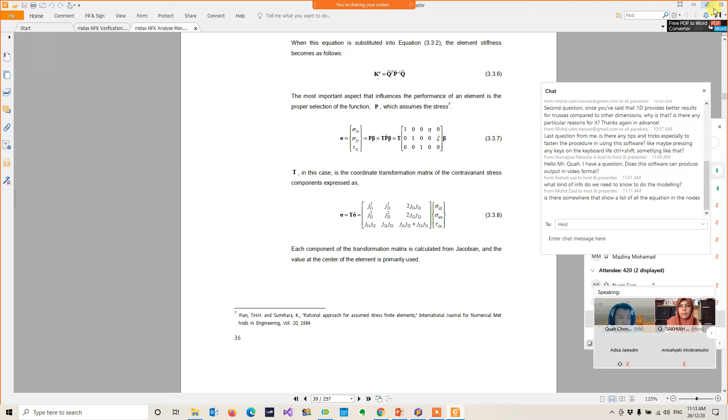Once you have installed the midasNFX — another question is, for the registration, can we use UiTM email? Sure, I think you have to use UiTM email if you have one, or if you do not have it, you can ask your supervisor. If you still don't have that, let me know and I will try to process it with you. As long as your supervisor or lecturer can confirm that you are one of their students, yes, you can do that also.

All right, so I believe I've already read all the questions, and to the students, if you still have a question, please drop it here. One more question: slope stability.

Yeah, further, I think there's one more question here — regarding stability. Is there any word from the panelist, the lecturer who teaches this subject, Dr. Adiza? Do you have more questions here?

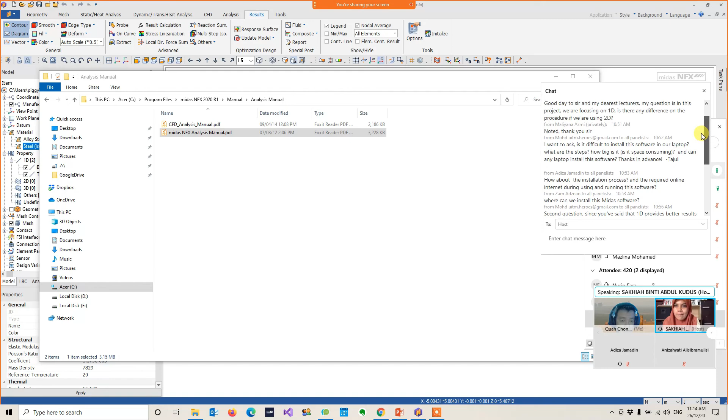Yes. Um... I think... no, one more.

So one more question. Can STAAD.Pro do this analysis as well? If it can, then which one is recommended for the FEA?

Well, it's up to you, it's up to the application. Most users I found are using STAAD.Pro, and a lot of users are using midasNFX. However, I would say midasNFX has a wider range of applications compared to STAAD.Pro because midasNFX can do much more, including CFD, including so-called slope analysis, etc.

Always remember that Midas is born from a civil engineering background, and the developers are from civil engineering. In the Midas company itself, we have developed more than 20 modules of FEA software. Midas NFX is one of them. We have Midas Civil, Midas Gen, Midas FX, etc. So if you are dealing with civil engineering, most users prefer to use Midas to do the analysis. But STAAD.Pro, yes, a lot of people like to use STAAD.Pro as well, but it depends on your application and your requirement.

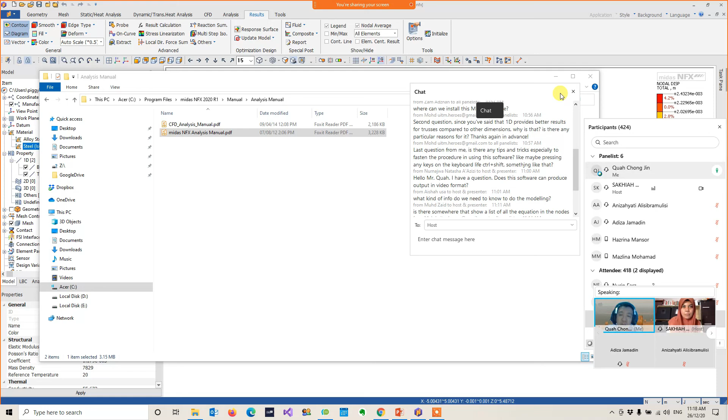Well, it's hard for me to answer your question, since I start with Midas NFX, so it's not fair for me to tell you that NFX is straightforward and easy to use and all those things. It's not for me to answer, but you can explore. You can explore, but I will guarantee that midasNFX has all the features you require - in civil engineering, not only for structural, slope analysis, or seismic analysis, but you can also model tunnels in midasNFX, and do quite a number of simulations. For myself, I prefer to use midasNFX, but in some cases I cannot use it because it's limited in some areas, so I have to switch to different software. Lastly, each software has its own strength.

I got one more question here. Does Midas software provide examples of various tutorials? Yes - not on the website, but on the local hard disk. Once you have installed it, you have various tutorials.

So how various is it? For example, like linear static - that's the one we have done. Modal analysis, I'm not sure you're going to involve that, is the so-called frequency analysis. You may need seismic, okay, both. Seismic analysis, nonlinear explicit - sometimes, let's say an aircraft is hitting a high-rise building, so what will happen? You may need to use nonlinear explicit analysis. So you have all the tutorials inside, including CFD as well. You can also use CFD with your license.

So the next question is - no more, I think, so okay, oh, one more. So Midas software is in need in civil engineering companies. If I am proficient in using Midas, is it an added advantage for me in order to become a structural engineer?

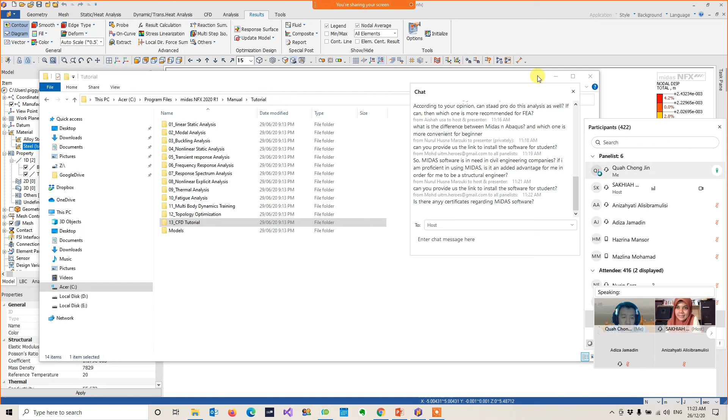Any more questions? So, any questions from panelists? Okay, that's all for me.